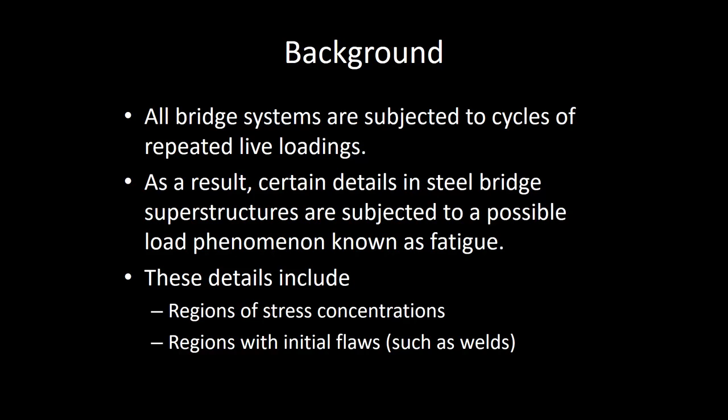What ends up happening from a mechanics perspective is that when you look at fatigue-related details, things like stress concentrations, welds, bolts, any sort of disruption in the fundamental stresses in the bridge, anytime you see areas of stress concentration or regions with initial flaws such as welds, you can have some really serious issues. To give you an idea, there are situations with certain details where steel has a yield stress of 50 KSI, something like that. Well, there are fatigue details that have a stress capacity of 12 KSI, much less. But it's just because of the way the connections are oriented and the stresses they're seeing, you can have much lower capacity under fatigue.

Now, what is fatigue? I can read out the dictionary definition if you'd like. Fatigue is the initiation and propagation of cracks, okay? In other words, imagine I've got this piece of metal, and there's a tiny crack in it. Well, imagine what happens if you're loading it and unloading it, loading it and unloading it. That crack is suddenly going to get a little bigger and a little bigger. Once a crack starts, it tends to want to travel throughout the section, okay? Those cracks can grow and grow and lead to some pretty big issues.

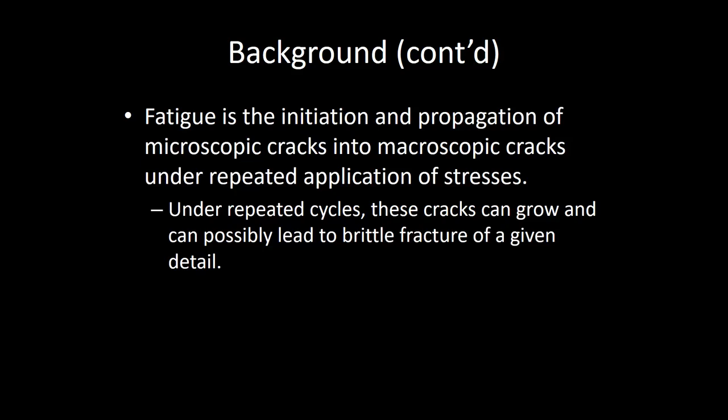We've seen this happen before, even in some of our research presentations. I believe somebody presented on Yellow Mill Pond, if I remember correctly. Yeah, so that's what happened, right? There was a repeated loading cycle, a crack initiated, and went right through the girder, right? Well, this is exactly what we're talking about here. A lot of what the spec was written about, and a lot of where fatigue specs came from, was Yellow Mill Pond and situations like this.

Now, fatigue failures can happen a number of ways, and I've mentioned this before, but ultimately it comes from one of two situations: anywhere there's an initial flaw or defect, or anywhere you have a stress concentration. Flaws, I think, are pretty easy to understand. If you have a flaw in the system, it's going to create a spot where a crack wants to develop. One of the things about a weld is that you're really creating a susceptibility at a particular point when you weld something. You're taking two pieces of steel and inputting a large amount of heat energy to essentially melt them together, so it's almost begging for an initial flaw, okay? That's just how it is, and there's really no way around it. Now, there are other situations where you can have a stress concentration.

For instance, if you have a bolted connection—for those of you that have had basic steel design, we talked about shear lag factors. I show a pretty common picture where you look at the stresses in a piece of steel that's got a bunch of bolt holes in it. You find that in the gross section of the member, the stresses are all nice and neat and uniform, but right there at the connection, the stresses are all over the place.

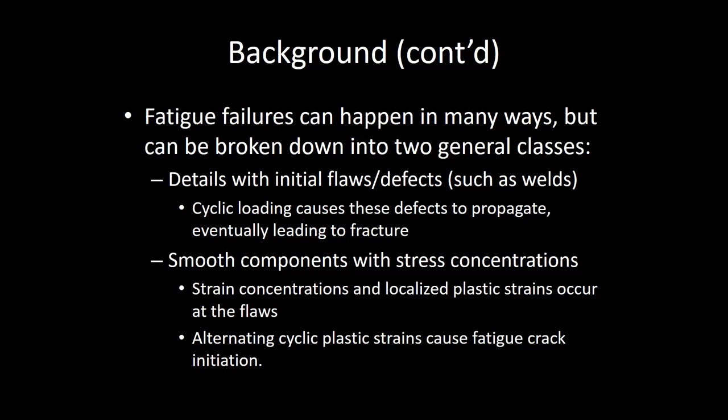That's why we use those shear lag factors from steel design. Remember, you take the net area and multiply it by U, that shear lag factor, because the stresses are going crazy right there around the bolts—you're creating stress concentrations. Stress concentrations: the stresses suddenly get higher. Well, high stresses lead to failures, so something to consider.

Now, a lot of the stuff we talk about with fatigue comes from a branch of engineering called fracture mechanics. If you're a mechanical engineer, fracture mechanics is a very common graduate level course. Most mechanical engineers take fracture mechanics in grad school. It's a very common class.

It's all about stress concentrations and points—like a particular point in a member where the stresses suddenly get larger and larger. We call those points cracks, where we have a stress concentration. There's a very critical parameter in fracture mechanics that I just want to introduce you to. I'm not going to go crazy into this—I just want to give you kind of an idea.

There's a very critical term called the stress intensity factor. It's kind of like if you took mechanics of materials—very fundamental formula, sigma equals P over A, or My over I, very fundamental. Stress intensity factors are pretty popular in fracture mechanics.

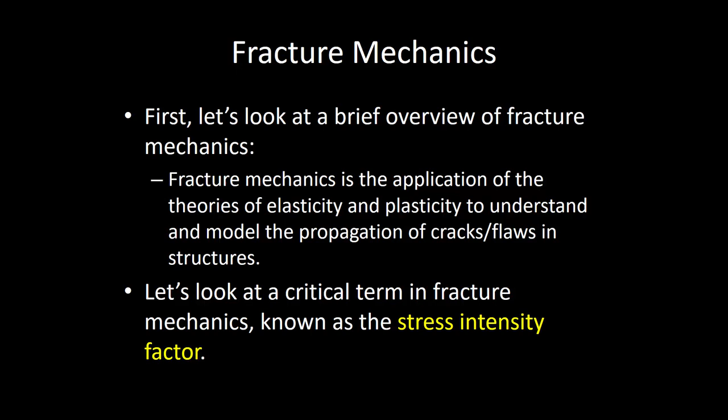So to give you an idea of what's going on, this is a very typical fracture mechanics problem. The idea is we have some plate, and we say it's infinitely long—we're trying not to worry about those dimensions, trying to keep it as simple as possible. We're saying the plate has an initial crack right here in the center. I say the crack is 2A long because I'm using symmetry—2A long, it's only A on the one end.

Right there at the location of that crack, if you go through all the math and solve for your stresses—and that's where fracture mechanics and all that grad school math comes into play—you find that you've got some really massive stresses right there. Now, the solution for that is this term over square root of 2 pi r. And this term here, we call that K1, and that K1 is what we call a stress intensity factor.

The idea is applied stress times square root of pi times A, with A being the crack width. Now this right here is the most fundamental case in fracture mechanics—an infinitely long plate with a crack in the middle. It's like if you did columns—the simply supported column, the fundamental case.

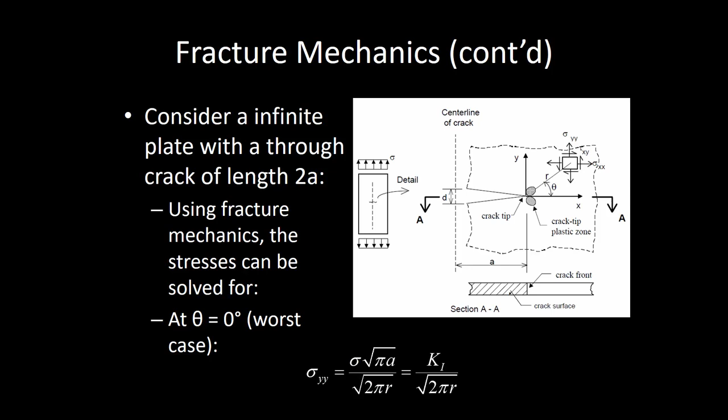Then you say, all right, well what if the column is fixed? What if the column has free ends or what have you? Then you start making the problem a little more complex—you start here and then you go on. So this is the more fundamental stress intensity factor.

But in general, we would adjust that by a couple parameters. We would adjust that by W, relating to non-uniform stress fields—instead of yanking on it, maybe we're bending it, maybe we're twisting it, what have you. We would also adjust that by a term Y relating to the geometry—maybe it's not an infinitely long plate, maybe it's a finite plate, maybe it's a triangular plate, maybe it's a plate with a hole in it.

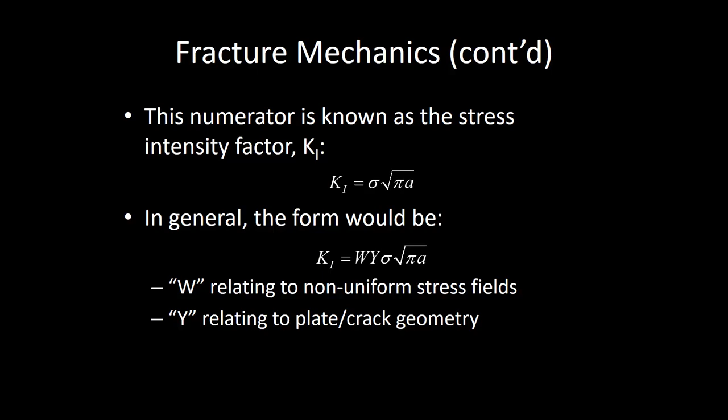All of that stuff—you can go back in the literature and probably find a lot of it on Google. There's just pages and pages of 'here's your situation, here's your stress intensity factor,' and what have you. Does that kind of make sense? This is just kind of some background stuff.

Now, what ends up happening with fatigue—and with fracture mechanics—is that as you're applying load, the stresses around that crack are getting larger and larger and larger.

You start to reach a point where, oh shoot, maybe they're getting too large and that crack's beginning to propagate, and then it's starting to fail. Think about it like this: imagine if you had a piece of paper. As soon as you make that initial tear, you've got a flaw in it.

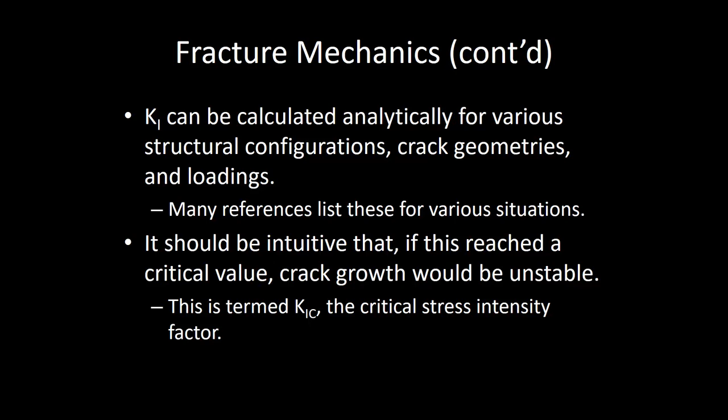And you start applying load, it becomes an easier and easier tear, and suddenly the paper's torn in half. It's kind of the same idea. There is a point when you reach a critical intensity, the member fails. We call that K1C, the critical stress intensity factor, one of the most fundamental properties in all of fracture mechanics. What is that stress intensity factor that will cause the crack to grow in an unstable fashion, and the member fails? That's fundamental fracture mechanics.

Let's talk a little bit about fatigue theory. Fatigue theory is when we're talking about cyclic loading, the idea that the member is loaded and unloaded, loaded and unloaded. Think about if you open up a can of soda.

You got a can of Mountain Dew. How many people rip the tab off? They don't like the tab. How many people do that? Anybody do that? You know, take the tab. How many people rip the tab off? Nobody rips it. Nobody's a tab ripper in here.

Now, I imagine you have seen the tab off the top of a can of soda ripped off before. How do you do it? Open it, and then you do what? What happens over time when you do that? You take the can of soda and you do that a little. What happens? It gets softer, right? It gets softer and weaker, and suddenly it just kind of falls off.

What's happening is under that cyclic loading of stress, you're exceeding that K1C, and it's just getting weaker and weaker. You start zooming in right there at that interface, you see those little cracks start to propagate. You get to a point where it's unstable, and it just pops off. That's kind of the idea.

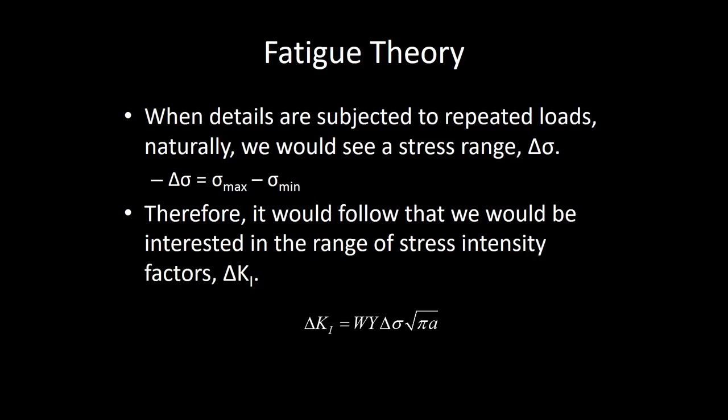The idea is that in fatigue, we are applying cyclic loading. So from a stress standpoint, we're talking about not a stress value, but a range of stresses, a change in stress: sigma max minus sigma min. Stands to reason then that there would be a range of stress intensity factors, a change in Ks.

The idea behind fatigue theory is that we're trying to determine how different parameters affect crack growth rate. That's what we're trying to figure out. Ultimately, that's going to be a function of a number of things. Number one, the number of cycles applied, N. Think about the can of soda: if I bend it once, yeah, it weakens it a little bit, but I've got to bend it over and over again before it fails. So obviously the number of cycles matter.

Point one is the number of cycles. Point two is the flaw size. If it's a really, really tiny crack, maybe it's not as bad as if it's a really big crack. That obviously matters. And then the range of stress intensity values.

Now go through fatigue theory, go through all the math, and you can develop a very fundamental relationship called the Paris equation. The derivative of the crack width with respect to the number of cycles is related to: A times your stress intensity range raised to a given power. I'm not going to derive that or get into fracture mechanics for you.

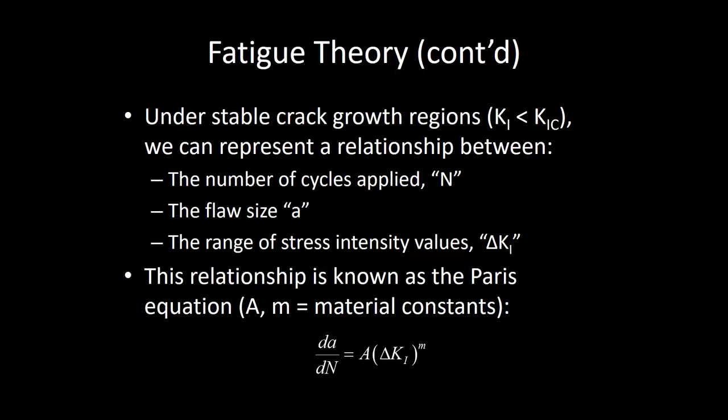But you're going to see some very familiar terms when we start looking at fatigue capacity, and I wanted you to have a general idea of what's going on. Now, ultimately, you can take this expression, substitute our expression for stress and solve, and we get that the change in stress is ultimately equal to A over N raised to a given power.

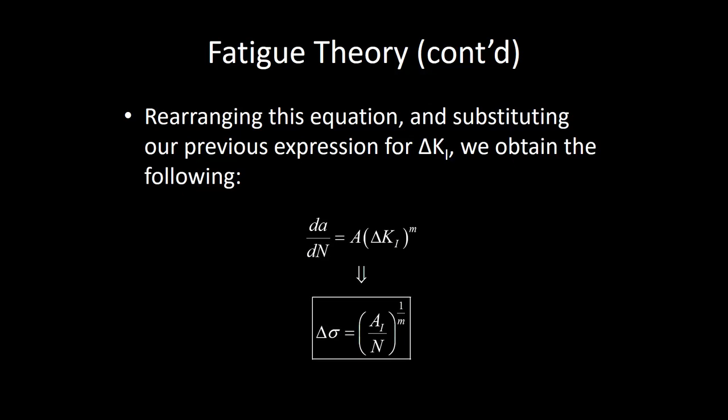What we'll end up finding is that for steel, some of those material constants are just that, constants. For bridge steels, this value M, which is a material constant, is 3, and they found that from experimental tests on different connection configurations. So our change in stress is limited to A over N raised to the 1/3 power. You're going to see that expression come up here in a second for finite life calculations.

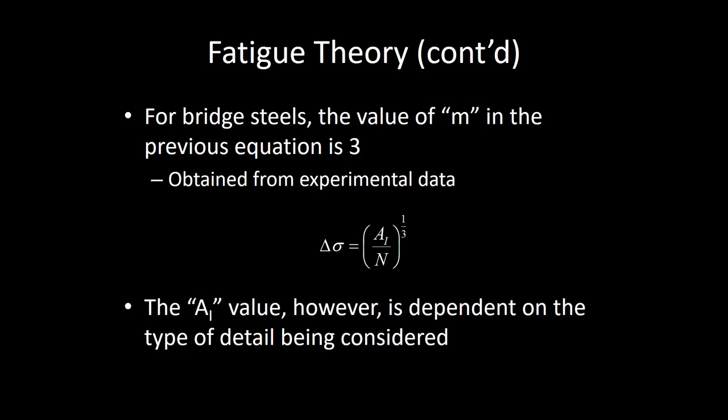That value of A depends on what type of detail you're considering. Is it a cover plate? Is it a cross-frame connection? Is it a splice? That value changes depending upon your detail. The idea is that if you go through and do a bunch of fatigue tests on different configurations—for instance, welded beams, beams with end-welded cover plates—you find a general correlation among those given tests, among all the welded beams, among all the beams with end-welded cover plates, and among all the cross frames.

What we can end up doing is breaking those up into a specific set of categories we're going to see here in a second. Okay. Everybody okay so far? All right.

Now, what we do in the bridge spec to make things a little easier to deal with is we develop what's called a fatigue threshold range. In other words, the idea is this: the more cycles that you apply, the lower the stress is required to fail it. Think about the Coke can, right? Bend it once, it's going to take a lot of bending to snap that tab off. But if I do it 10 or 12 times, it gets weaker and weaker. The more cycles, the less stress is required to fail it.

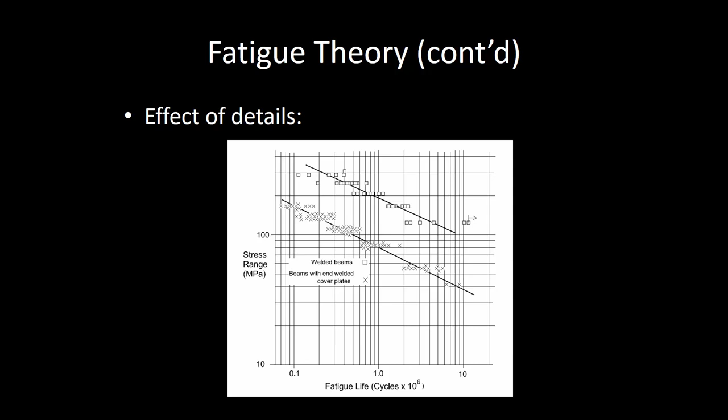And that's what's going on here on this plot. We've got the number of cycles, plotted on a logarithmic scale, in case that parameter matters, versus the stress range. The more cycles we apply, the less stress is required to fail it. Make sense?

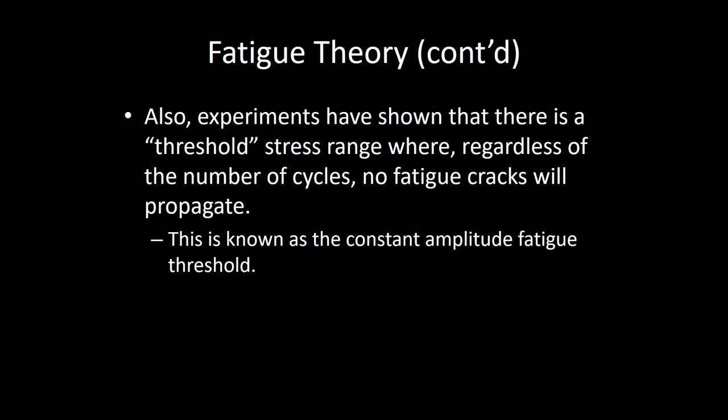Well, what we do is we say, all right, when you get to a certain point, we just cap it off and say there's a given fatigue threshold that we cap this off as our capacity. In other words, once you hit, I'll make up a number, 2 million cycles, we just cap the stress off at 12 KSI and say that's going to be the fatigue capacity for the rest of its design life. And that comes from experimental testing as well. So we call that a fatigue threshold. The idea is that once you reach that, it doesn't matter how many cycles, that's going to be your maximum capacity.

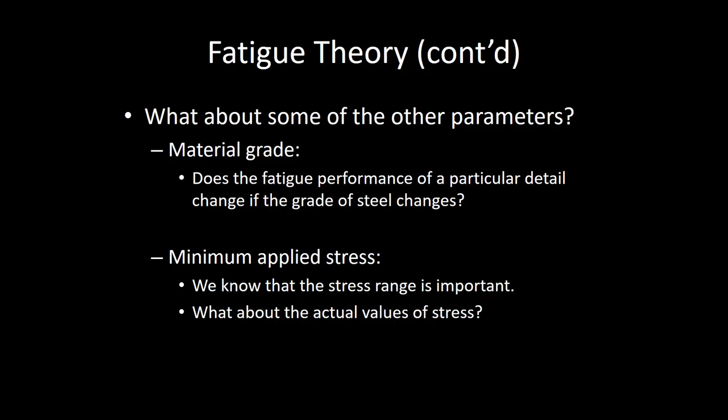Now, there are some other factors that you might think might come into consideration, and ultimately we're going to see that they don't. For instance, what about material grade? Does the fatigue performance of a particular detail change if I use 70 KSI steel versus 50 KSI steel? Second, what about the minimum applied stress? That might be a little subtle, but I'll explain that in a minute. Basically, I'm talking about fatigue range. What about the initial load? If it initially had 5 kips on it versus 50 kips, does that matter? We're going to see here in a second that it doesn't.

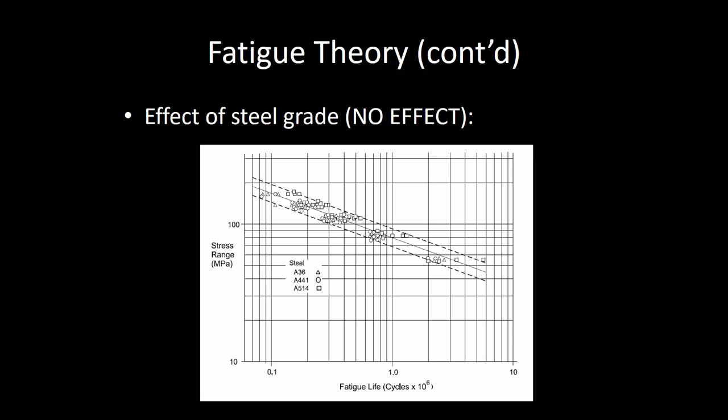So let's start off looking at material grade. This is looking at the same connection details, looking at their fatigue capacity, but with A36 steel, A441 steel, A514 steel, all these different steel grades, same connection configuration. What we're finding is not really much effect. That's from the test data, from all the experiments that have been done. Steel grade really doesn't affect fatigue capacity at all. 50 KSI steel versus 70 KSI steel versus 36, doesn't matter. In this world, steel is steel. It is what it is. So that's the effect of steel grade: there is no effect.

Also, if we look at the effect of minimum applied stress, there's no effect on that as well. Now I think that this graph is a little confusing to explain what's going on when I say minimum applied stress. I think an easier graph to understand is this one.

When we look at fatigue, what we care about is the range of stress that's applied. Let's say I start off with a girder that has no load on it whatsoever. Let's make up some numbers: I go from a sigma max of 5 KSI to a sigma min of negative 5 KSI, because we know by now that girders can experience positive and negative bending. So if this is 5, and this is -5, what's the range? 10, right? I propose that this girder will behave the same as this one and as this one.

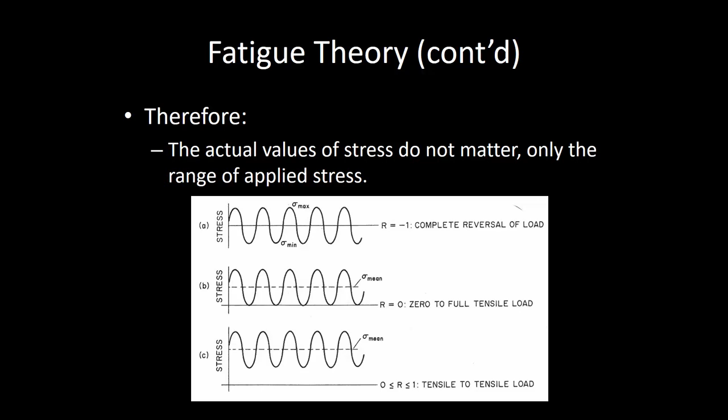In other words, this is from, let's say, 5 to -5. This one is from 0 to 10. This one might be from 15 to 25. But as long as that range is the same, as long as the fatigue range is the same, it's fine. That actually really matters if you think about it, because when we look at fatigue, we're going to be looking at the live load. It doesn't matter how much dead load was on the system beforehand. All we care about is the range of stresses that are applied due to the fatigue load. That's it. Any questions?

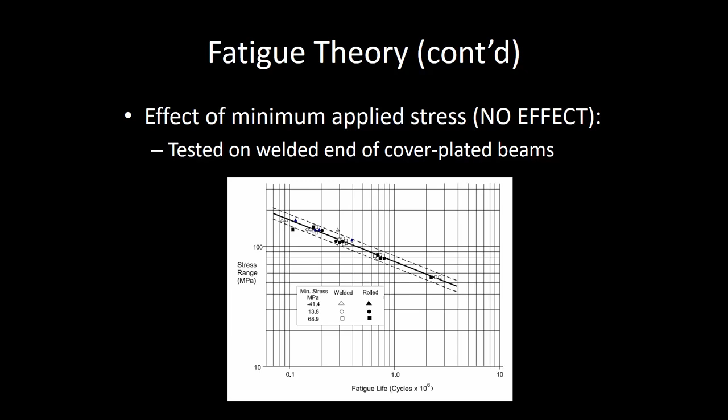And this plot here is just showing different initial stresses, same behavior. Everybody good? All right. Okay.

So let's take a moment and talk a little bit about what's going on in AASHTO, specifically the spec. I just realized I forgot to pass this around.

I'm slipping on this stuff.

In AASHTO, we use two different ranges for fatigue capacity. We're either dealing with finite life capacity or infinite life capacity, and it's a function of the number of cycles. If I'm talking about some bridge in the back of the woods that sees two cars a day, it's going to be governed by finite life. But if I'm talking about an I-64 overpass that sees an ADT of 10,000 or something, that's going to be an infinite life fatigue category. It's all a function of the number of cycles.

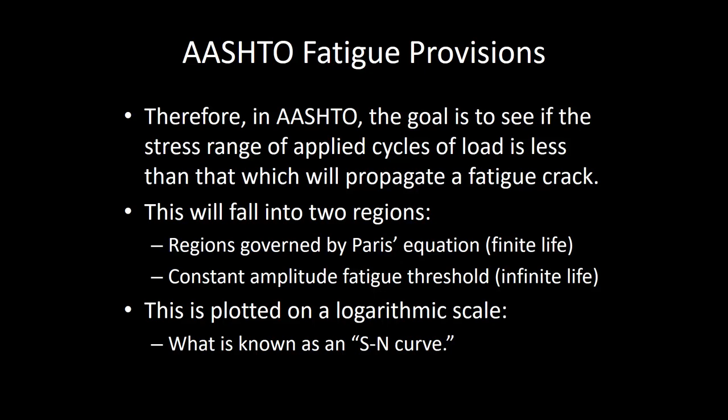Now we plot this relationship between the number of cycles and the stress range on what's called an SN curve - stress range, number of cycles. So if you ever hear engineers use the term SN curve, they're talking about fatigue. This is generally what a fatigue capacity curve looks like. They're plotted on logarithmic scales just because of the nature of the mathematics.

The idea is this: for finite life, it goes back to the Coke can. The more cycles that you apply, the lower the capacity, right? For infinite life, we reach a given point where it doesn't matter how many cycles you apply, that's your capacity. So our capacity is either A over n raised to the 1/3, that's the derived Paris equation I showed you earlier, or we're capped off at a constant amplitude fatigue threshold. If your stresses are somewhere down here, you're good, because that stress is lower than what's required to fail it. If it's above that, we've got problems. Pretty simple, right? Everybody good?

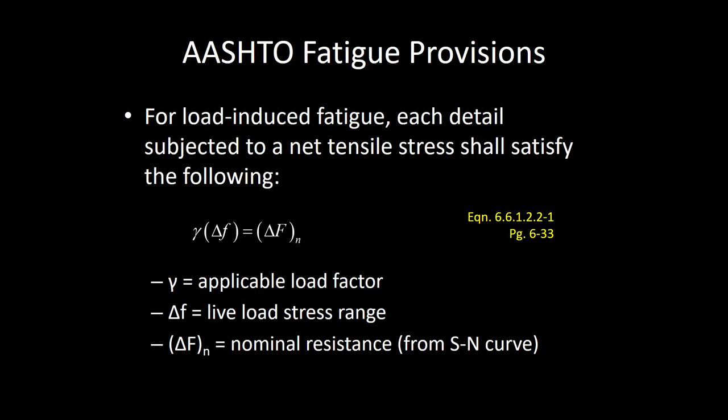Okay, don't worry, we're going to go through a pretty basic example. So here's the long and short of it: the idea is that fatigue applied stresses have to be less than or equal to their nominal resistance. So let's talk about how we actually compute that in the spec.

Now these are some examples of fatigue-related details. Did I give you AASHTO Section 6.6? I can't remember if I did or not. I thought I did, I might not have actually. If not, I can give that to you next week, it's no big deal. It would have a bunch of images that look like this. I can't remember if I gave it to you or not, I'm getting the feeling I didn't. Oh well, no biggie, I can give this to you next week, that's no big deal.

So the idea is that based on a grand series of details in the spec, we can determine our fatigue categories. Fatigue details are those where you're introducing either potential flaws or stress concentration. So for instance, if I've got an I-beam, here's a fatigue-related detail, that weld right there between the bottom flange and the stiffener or the connection plate. Which is one point I should mention that I kind of glossed over and probably shouldn't have - when we're talking about fatigue and crack propagation, what we ultimately care about really are stresses in tension.

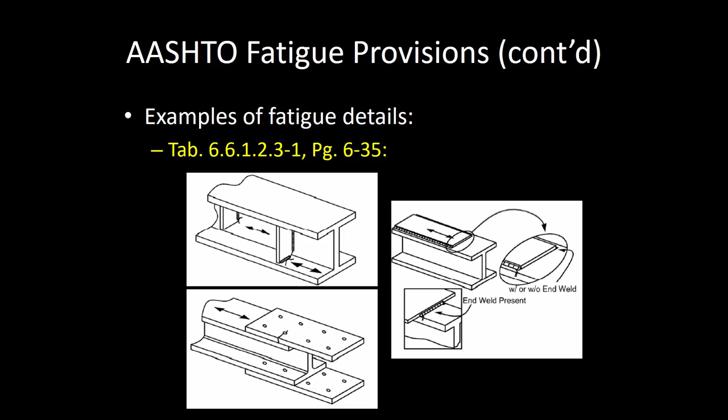Other than that, those are really the only fatigue-related details that we see in most modern bridges. There are longitudinal stiffeners here and shear studs, but we're going to do shear studs later on tonight.

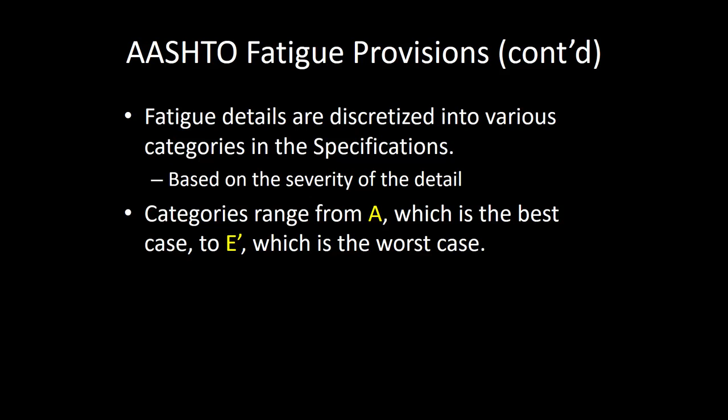Based on the severity of the detail, whether you're dealing with plain steel or a welded cover plate like what was going on the Yellow Mill Pond Bridge, we grade fatigue-related details. It's kind of like levels of service in transportation, or grades and classes. We have grade A, which is the best performance ever, hardly will ever fail, down to E prime, which is the absolute worst case.

Here's what it ends up looking like. This upper graph is a category A detail, demonstrating the absolute best performance. This is a category E prime detail, the worst performance. As we go down the list, they get worse and worse. So we have A, B, B prime, C, C prime, D, E, and E prime. As you go down, the behavior gets worse and worse.

It all comes from the test data that they did. The long and short of it is there are some general trends among the categories. For instance, a lot of C's and C primes relate to longitudinal welds loaded in direct tension, whether that's a stiffener or an end plate or something like that. But why they don't have a D prime or an A prime, I don't have a great answer for you. That's how Fisher decided to organize his fatigue details. There really isn't a good answer - that's what John Fisher at Lehigh decided to do. It's also where the data laid in. Why didn't they just go A, B, C, D, E, F, G? I don't know, maybe they wanted to stop at E. That's the best answer I've got for that.

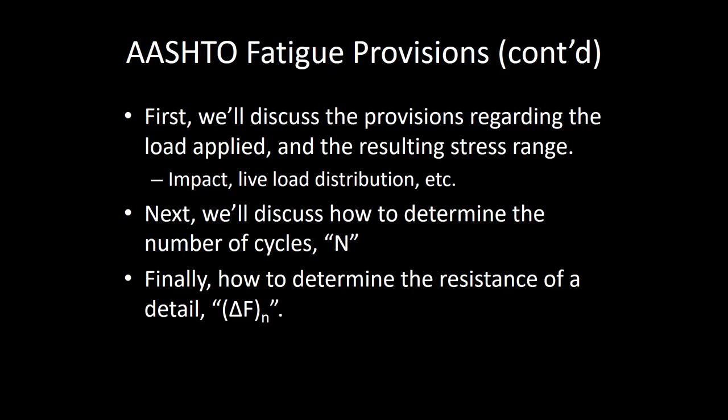Now let's talk a little bit about the loads - the loads, the cycles that are applied, and finally how to determine the resistance. Let's take that one at a time.

First off, the load. The fatigue load consists of just the truck - we're not looking at the lane, not the tandem, just the truck. Something to keep in mind: the rear axle spacing is not 14 to 30, it's fixed at 30. That comes from the calibration done for the fatigue limits in the spec. They calibrated it off the HS20, fixed with 30-foot fixed spacing - actually they calibrated it off the HS15, but we'll see how that comes about.

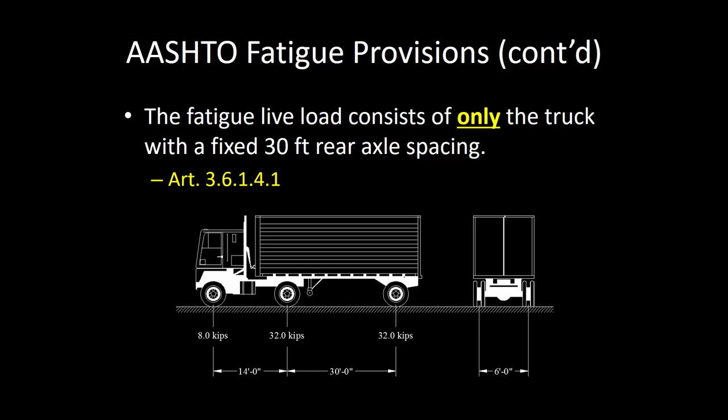Now a couple notes regarding the fatigue load. For impact, if you recall we used 1.33 for all of our impact factors for strength and service. For fatigue, we're really only considering that single constant truck, so we're allowed to use a lower impact factor - we use 1.15.

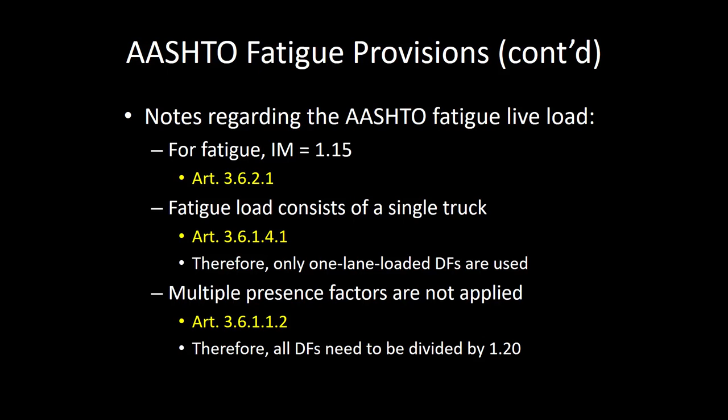Now these we've actually already dealt with. Remember how we determined fatigue live load distribution factors? We took all the single lane loaded ones, and then divided by 1.2. The reason is because we're only looking at one truck. So because we're only looking at one truck, we only use the one lane loaded distribution factors, and divide by 1.2 because we're cutting out that multi-presence factor.

So there's the load. Now we need to talk about the number of cycles - this is where the transportation stuff comes into play a little bit. The number of cycles on a given bridge is a function of the average daily traffic. I know my transportation folks in the room have at least heard that term before.

We need average daily traffic data for a given bridge in order to assess fatigue. Now, I guess I should take a step back - actually, no, you could just say you don't care what the number of cycles are, and go with infinite life because that's actually the most conservative estimate. Then who cares if 20 years down the line the traffic doubles?

I know I can handle it, right? But, you know, we'll try and be a little scientific about it.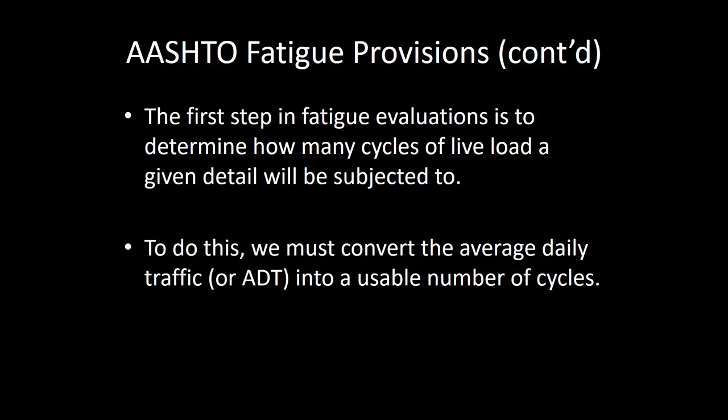So to start off, we need average daily traffic on a given road, okay? But that's not good enough. We have to take that average daily traffic and convert it into average daily truck traffic. Now, if you've actually got the data, great, that's wonderful. If not, we can use some approximations in the spec.

So for instance, let's say you got 1,000 vehicles a day on a given bridge, and let's say that bridge is in the middle of Huntington. So it's an urban area, but it's not on the interstate. We can say, well, it's in the middle of a city, it's got 1,000 vehicles a day, probably only 10% of that is heavy truck traffic. So instead of using 1,000 vehicles a day, we would use 100 trucks per day. So these adjustment factors are going to help us adjust average daily traffic to average daily truck traffic. Make sense? Okay, now that's average daily truck traffic.

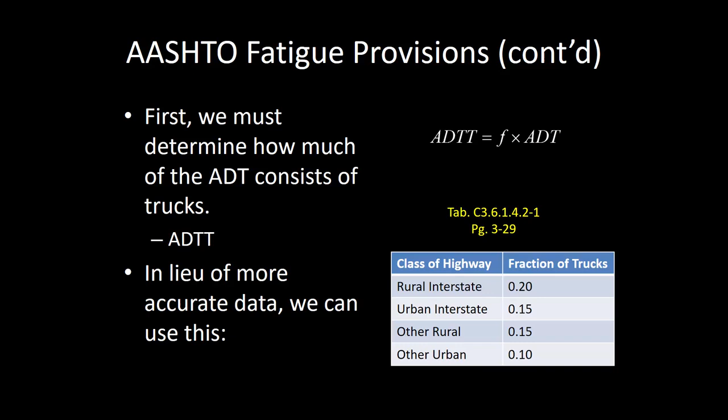Since we're talking about a single truck, we then must ask how much of that truck traffic occurs in a single lane. Now if you got a one-lane bridge, 100% of it. If you've got a two-lane bridge, we bump that down a little bit, and we say only about 85% of that truck traffic can really be assumed to act in a single lane. Three or more, we say 80%. Now again, if you've got the data to back it up, use it. These are approximations, okay?

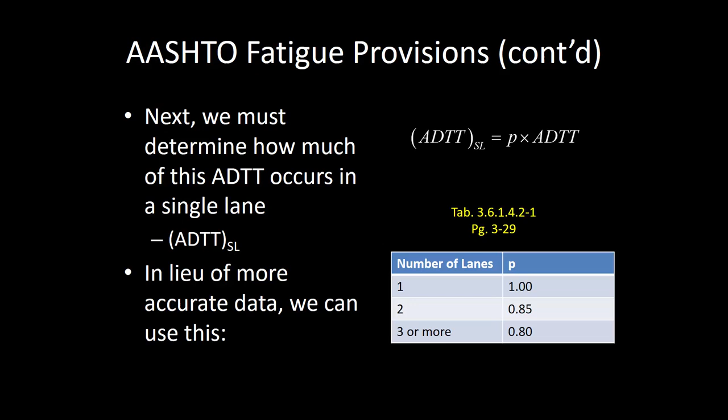Everybody good? So for my bridge in Huntington, if there's 1,000 vehicles a day, there's 100 trucks per day, but if it's 2 lanes, I'm only going to count 85 trucks a day, right? Sound good? All right, okay.

Now, this is one part of the spec I'm actually not a fan of. That used to not be like this. It used to be that the fatigue load factor was 0.75, and it was always 0.75. But now they've developed 2 load combos in the spec, and I'll be perfectly honest, I'm not a fan of it. They have Fatigue 1 and Fatigue 2. Fatigue 1 relates to infinite life, Fatigue 2 relates to finite life. And the way that they've reported the fatigue amplitude, or the constant threshold stresses, and the way that they've reported the A's and N's and whatnot, they've actually got 2 different load factors. Personally, I think this overcomplicates the issue, but that's me, okay?

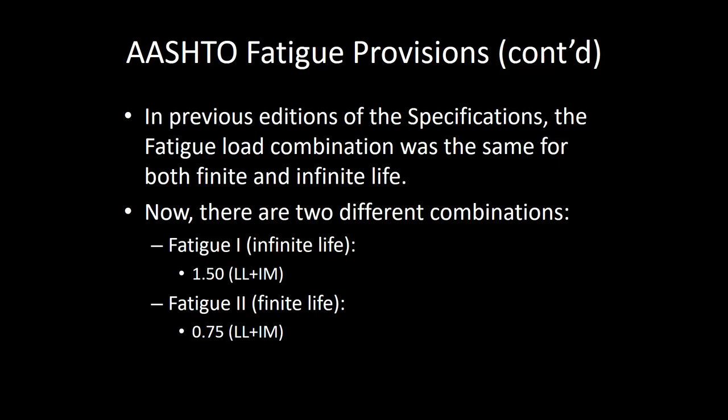So just wanted to sort of report that out. I wouldn't be harping about this if we were using the 2007 spec, because they didn't even go into this, and I thought it was much easier then. There is maybe some logic behind it. I still think it's a bad idea.

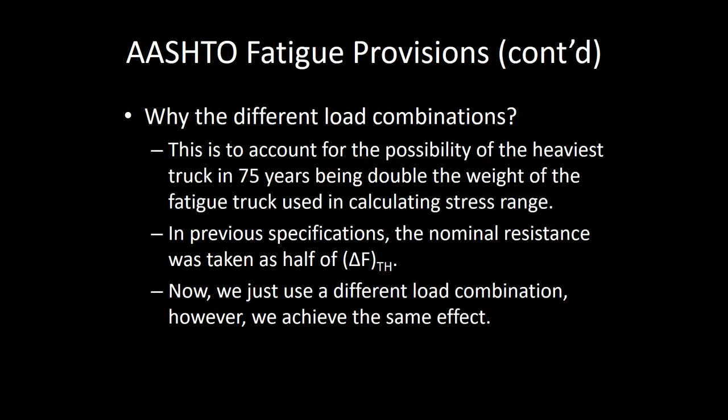They're trying to account for the possibility that over the year of the life, the truck will get heavier, and I think that does maybe have some validity to it. Back in the day, vehicular bridges just didn't see the loads that they do now. But they used to handle that in the spec differently, and I think they handled it before in a much clearer fashion. So I do apologize for that. Usually what they would do is they would just cut that in half and everything would be washed out. So ultimately the math achieves the same effect. I apologize for the complication.

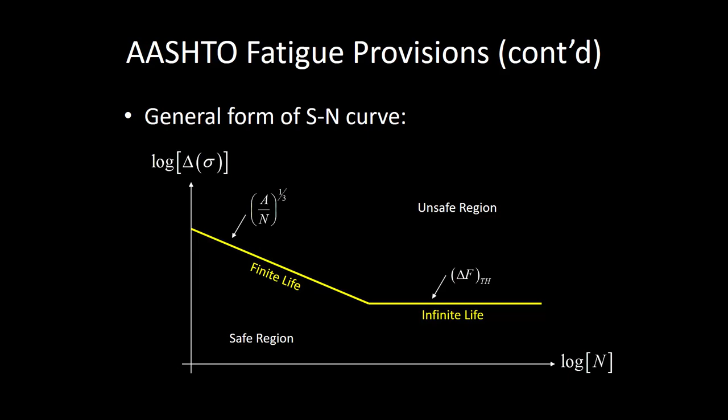So what they did is they took each one of those fatigue categories and said, let's solve for the number of cycles required to reach that point. If you've got more cycles per day, then you're in infinite life, less and you're in finite life. So it makes our life a little easier. So long and short of it is, for instance, if you're talking about a C prime detail, and you do all the math and find that you've got 1,200 trucks a day on your bridge, well then you're in infinite life, because anything more than 745, you're in infinite life. Does that make sense? Any questions on that? Okay.

So if I want to determine the fatigue resistance, it's either constant fatigue threshold, or if I'm in infinite life, finite life, it's A over N raised to the 1/3. And A over N, they're just lookups.

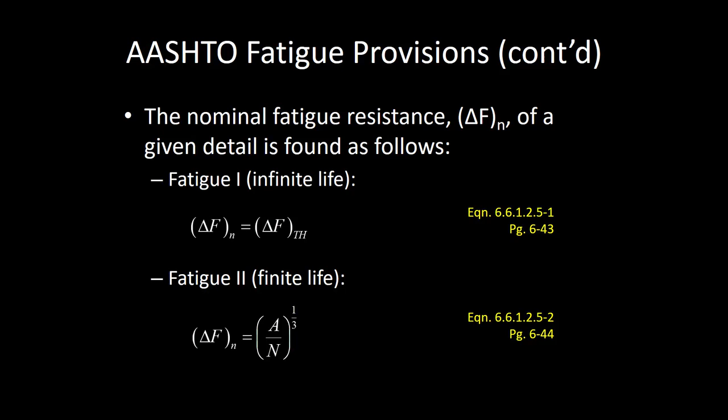I'll provide the tables next week, but I think you're going to see it's not really going to matter, it's pretty straightforward. Actually, never mind, they're here. I forgot I put them in the spec or in the presentation. So depending upon your... actually, let's see.

Everybody okay with this? All right, okay, now this is just some food for thought. If we are in finite life, we need the number of cycles. Now, how am I computing this?

I think the jury's still out on that, I don't think they've made final decisions. There has been talk of upping some of these fatigue load factors to 1.75. It is what it is, we just sort of go along with what the code spec bodies say makes sense.

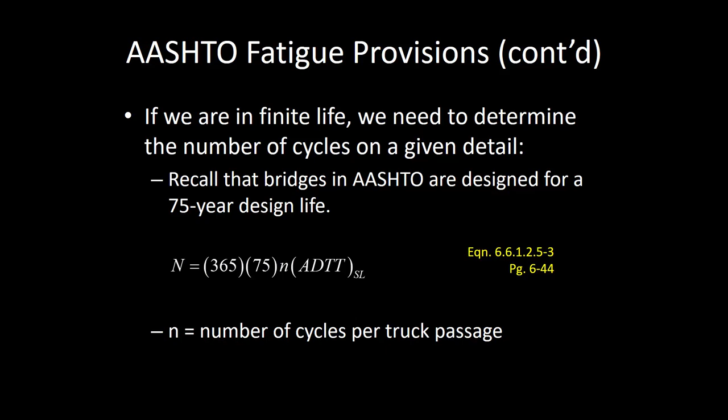This term n represents the number of cycles per passage. In most cases that we would deal with, it's 1. There are some instances where, like for instance, if you've got a really, really short bridge, let's say a 30-foot bridge, you might have one truck running over that bridge, but it might generate 2 cycles of loading.

I mean, think if you had a really, really short bridge. You have a truck run, well, the front wheels run over the bridge and that creates a cycle, and then the back wheels hit and that creates another cycle. So if you've got a really short bridge, we actually say for every truck run that's 2 cycles of loading. Does that make sense? We wouldn't do that on like an 80-foot bridge, but on a 40 or a 30-foot bridge, that might be worth considering.

Some other scenarios, we might bump those number of cycles up a little bit more as well. Does that make sense? Okay, now let's look at an example.

Now I've got this titled NSBA Example 2, a confession. This bridge that we've been looking at all semester comes from a document published by the National Steel Bridge Alliance, hence the NSBA. They have a number of chapters in their Steel Bridge Design Handbook that are really worth looking at, and I'm going to provide some links next week to close out the semester. But they also have a whole bunch of design examples. We've been using Design Example 2 this whole semester, so NSBA Example 2, that's this bridge.

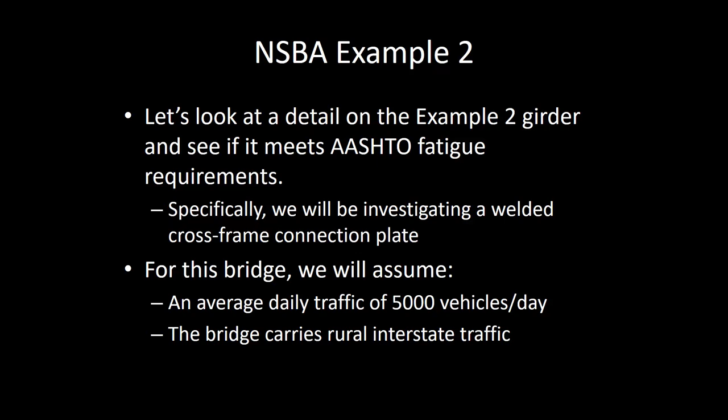So I want to look at the fatigue calculations for a given detail on this bridge. Now we're going to assume an average daily traffic of 5,000 vehicles a day, that's what we're going to assume. We're going to assume that the bridge carries rural interstate traffic, and we are going to investigate a cross-frame connection plate. Let's just see how this works.

So to start off, let's determine whether we're in infinite life or finite life. Since this is rural interstate, I'm using a constant of 0.2, right? So 5,000 vehicles a day is 1,000 trucks per day. Now, out of those 1,000 trucks per day, I'm assuming, since it's a two-lane bridge, 85% of them are going to go in a single lane. So y'all with me on that? That's 850 trucks a day that I need to consider for fatigue.

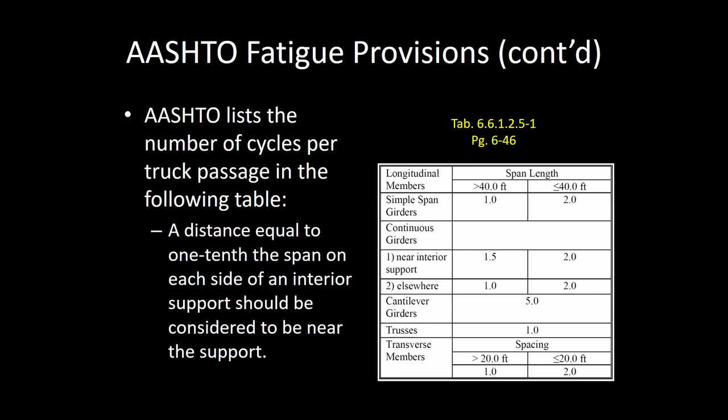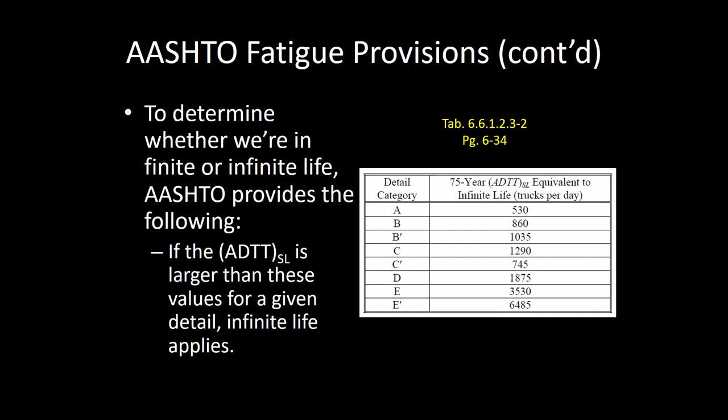Everybody okay with that? Now, I'm going to go back a couple slides to this. We're looking at a C-prime detail. This is the number of cycles that meets that limit between infinite life and finite life. We've got, what, 850, something about like that, 745, we're in infinite life territory. Make sense? If we're in infinite life, that's our capacity, 12 KSI.

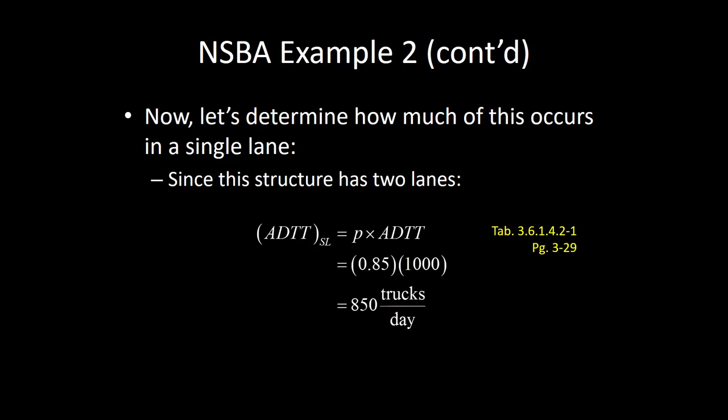So this tells us that we are in infinite life, and if we look at a C-prime detail, we have a fatigue threshold stress of 12 KSI. So that's our capacity, 12 KSI.

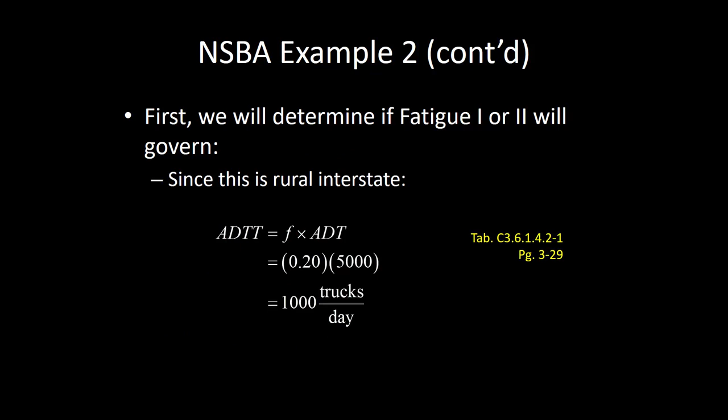I just noticed there was a flurry of pens. As soon as I put this slide up, everybody started writing. I'm like, I remember. Sorry about that. Okay, is everybody okay with this?

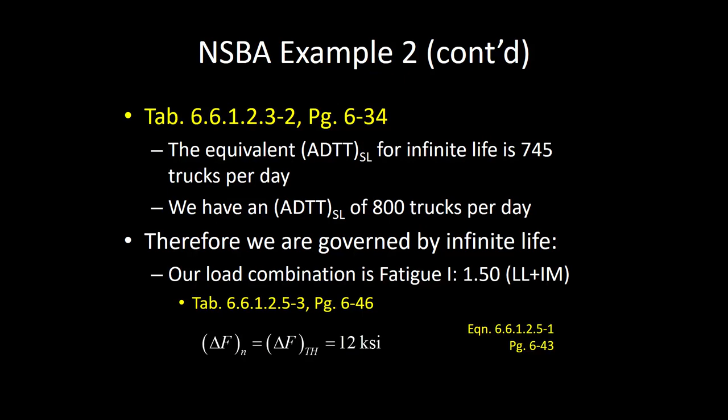Okay, so the capacity is 12 KSI. Now let's talk about the loads.

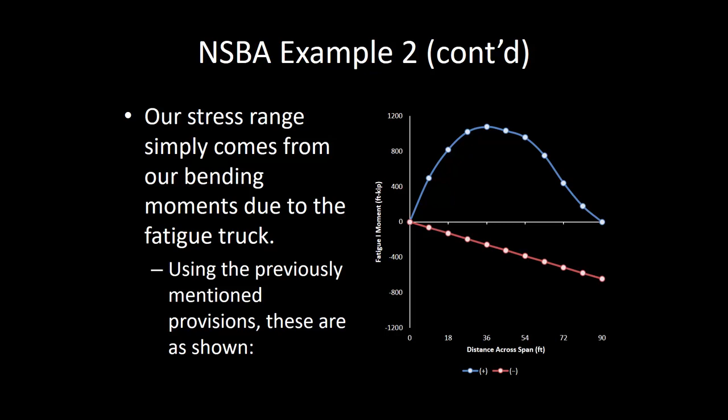This is an image of the fatigue moments on the bridge. These are the fatigue moments. Remember, there's fatigue positive moments and fatigue negative moments. I'm looking at a cross frame, particularly right there, trying to pick the cross frame in the worst case location.

The cross frames on this bridge are every 20 feet. So we're right here, then 20 feet is about right there. Here's 40 feet, here's 60 feet. That right there is probably going to be the worst case range of stresses for that cross frame.

Make sense? So some of you have a cross frame at midspan. Fatigue's probably going to be a bigger deal for those of you with a cross frame at midspan than for those who don't. For instance, I know there's a bridge that's 60 foot long with cross frames at 30 feet. Who has that bridge? Anybody remember?

Y'all are almost done with the project, right? Who's got the 60 foot long bridge with cross frames at 30 feet? Anybody remember that? Ooh, it's going to be a busy couple weeks, isn't it? What's that?

Yours is 80-20, so you've got a cross frame at midspan. So for you, you're going to check the moments right at midspan, and fatigue's probably going to be a bigger deal for you than some.

Let's see, I'm trying to remember some of the different parameters. I know there's a 60-20. For that one, fatigue probably isn't going to be that big of a deal because you don't have a cross frame at midspan. For you, the cross frame is somewhere over here, and the range of moments is just not going to be as bad. I'm not saying don't check it, but it's just not going to be as big of a deal for you. Does that make sense?

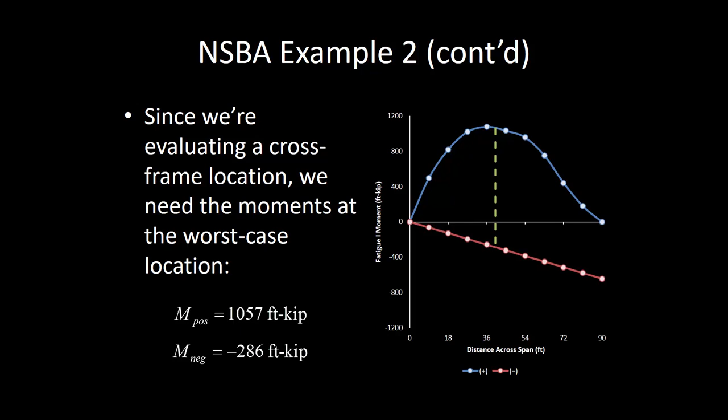Now, this is live load. Live load goes on the short-term composite section, right? You all know how to compute that, all the moments of inertia and all that. So here's the neutral axis of the short-term composite section.

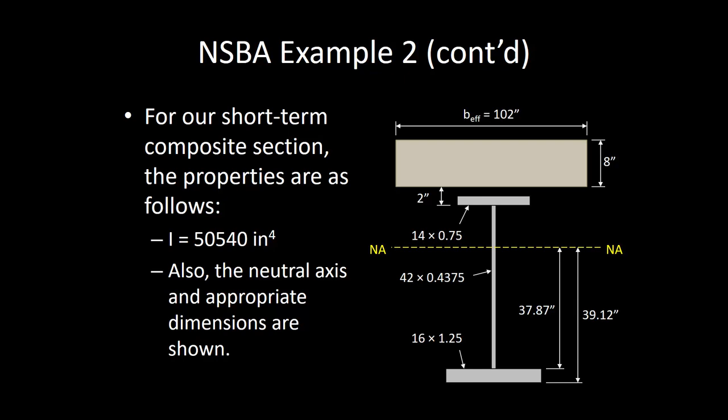Now the centroid is 39.12 inches from the bottom to where the neutral axis is. What I care about is this distance right here, from the centroid to right there, because that's where the connection plate is. Because you're going to have some connection plate filling in right here, and I'm looking at that. So sigma equals M y over I. I need the distance from here to that. Does that make sense? Everybody okay with that?

Okay, so when I have that, here's my moments, there's my y, there's my moment of inertia, M y over I. I get 7.18 KSI. That's less than 12, so I'm good. That's it, that's fatigue.

Told you the math isn't that tough. It's pretty simple, right? You all already have all the algorithms to do the linear interpolation. You can figure out the moments anywhere. You've got your section properties. It's M y over I, that's it. So does anybody have any questions about that?